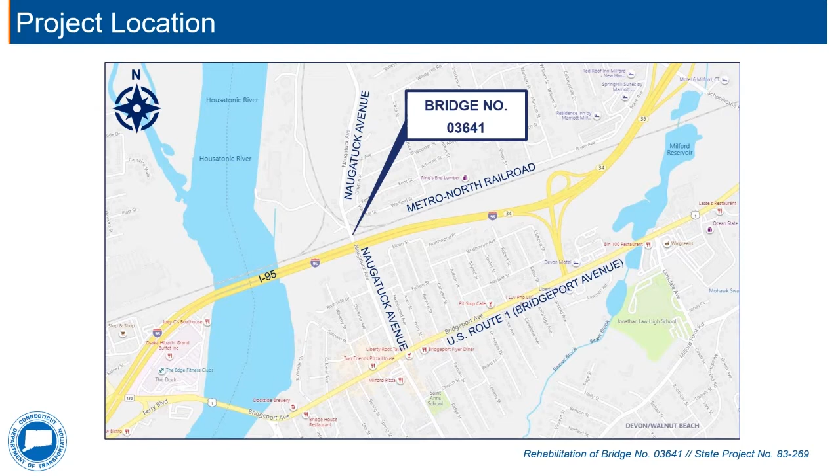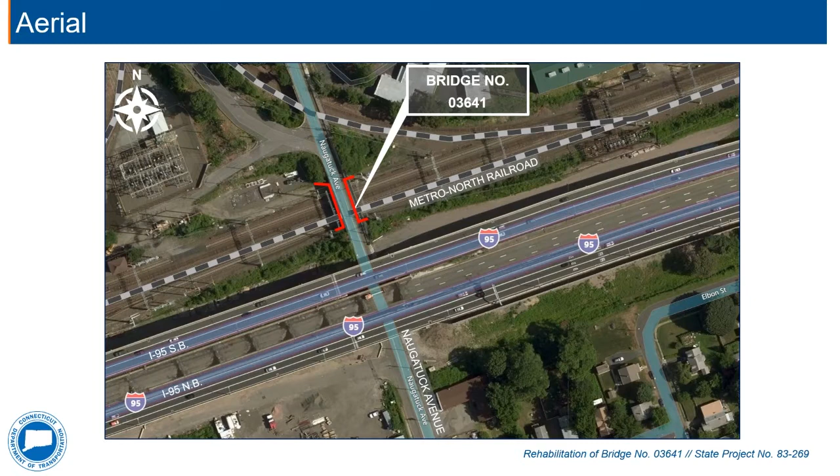During the course of this presentation, you may hear us use terms that aren't necessarily familiar to you. We thought it would be helpful to introduce you to a few.

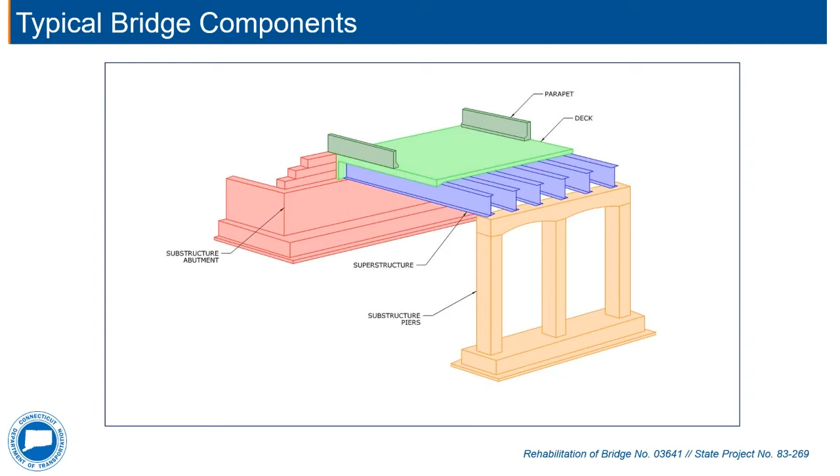The average daily traffic, or ADT, along Naugatuck Avenue is approximately 3,500 vehicles. This is based on the 2015 CT-DOT traffic log. Traffic on the tracks consists of 19 daily trains during the week and 18 daily on the weekend.

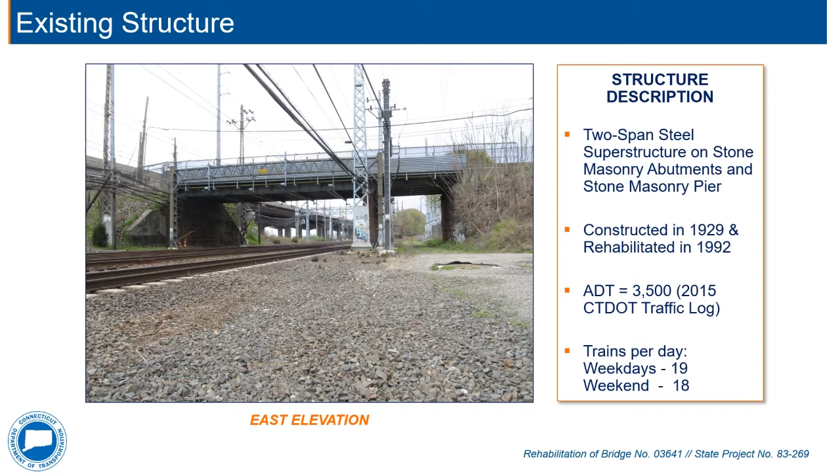This slide shows a closer look of the structure at track level. As mentioned before, this is a 99-foot-long, 2-span structure. The first span is 67 foot 10 inches long and crosses over 4 Metro North rail lines.

It is comprised of 2 steel girders with a floor beam system that supports concrete deck panels. The second span is 26 feet 5 inches long and crosses over the adjacent access road. It is comprised of multiple steel stringers that support concrete deck panels.

There is one sidewalk on the east fascia of the bridge. The curb-to-curb roadway width of Naugatuck Avenue in this location is 23 feet.

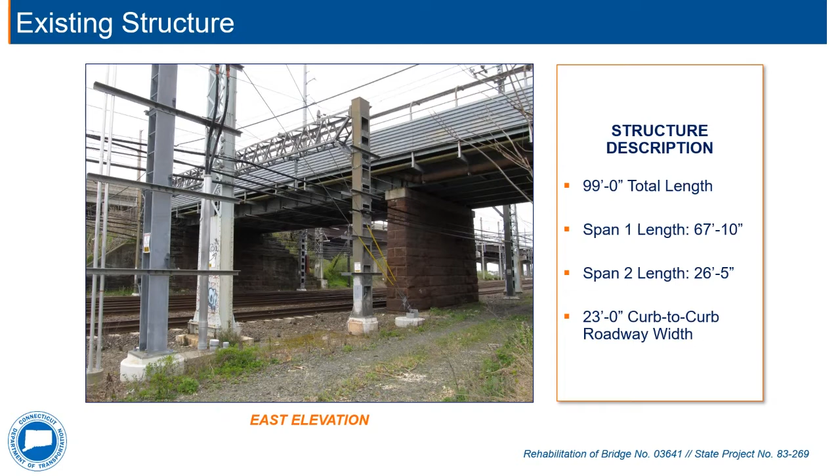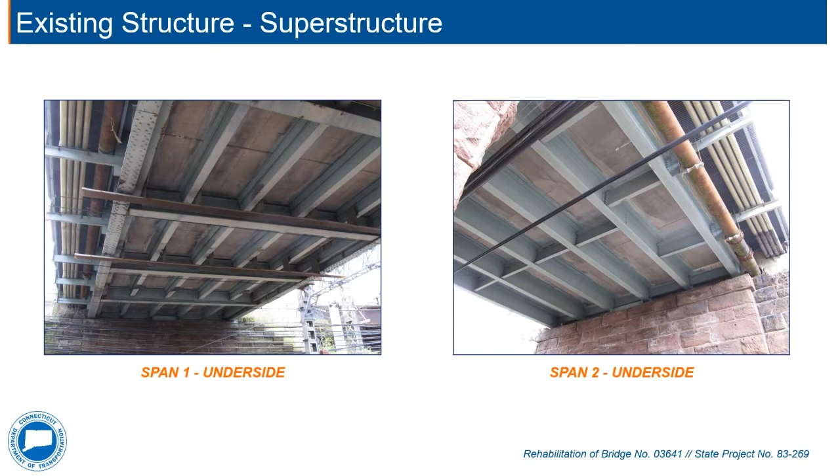Every bridge is evaluated to determine its ability to carry load. This analysis is called a load rating and considers several different types of vehicles which are predetermined by Connecticut and federal agencies.

Our bridge, bridge number 03641, has a substandard load rating which indicates a need for bridge strengthening.

I will now turn over the presentation to Greg Garish from BL Companies, who will explain the proposed project to rehabilitate this bridge.

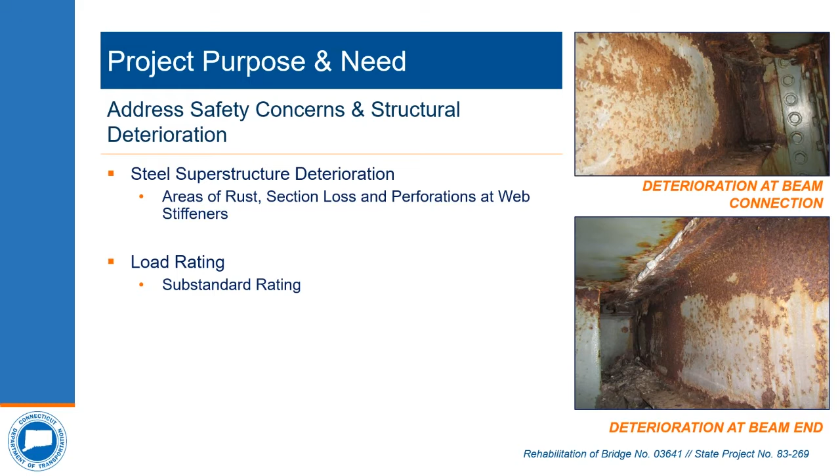The proposed rehabilitation will replace the existing bridge surface or bridge deck with a new concrete deck at span 1, which is the section of the bridge that crosses over the railroad tracks. We will also replace the span 1 concrete parapets and repave the bridge surface and approaches. Span 1 steel beams will be evaluated by the design team to be repaired and replaced as needed. The superstructure beams will also be repainted. Additional traffic protection measures will also be installed, including metal beam guide rail and precast concrete barrier curb.

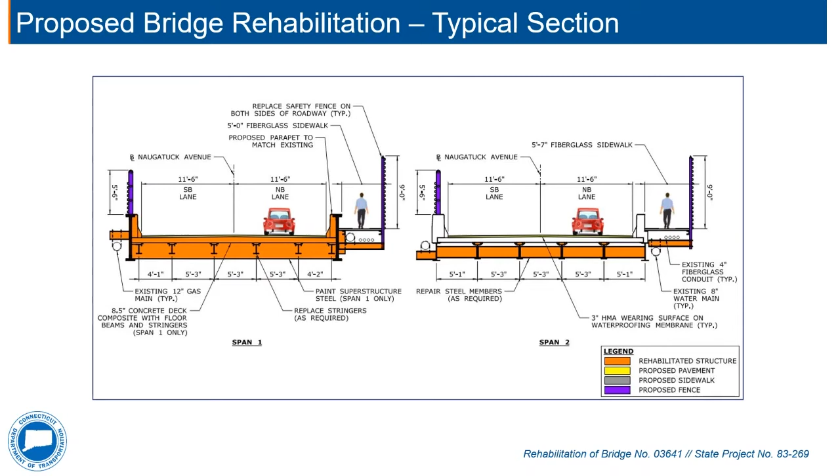In order to perform this work, traffic will be temporarily detoured around the project site via Naugatuck Avenue, US Route 1, and West Avenue. This is the posted truck route based on local road restrictions. However, local traffic will have the opportunity to use alternate routes. The proposed detour is anticipated to last 4 months.

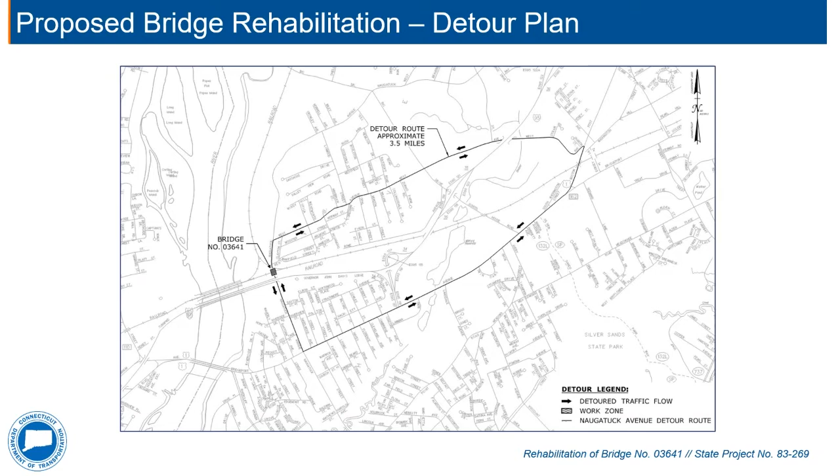Utilities supported by the bridge will be supported and protected in place during construction. Aerial utilities in the bridge vicinity will be relocated for the proposed work. The majority of the bridge rehabilitation work will be performed from the bridge surface and roadway. Minor repairs below the bridge will be coordinated with the railroad and will require night work during track outages. Environmental permits and impacts to rights-of-way are not anticipated for this project.

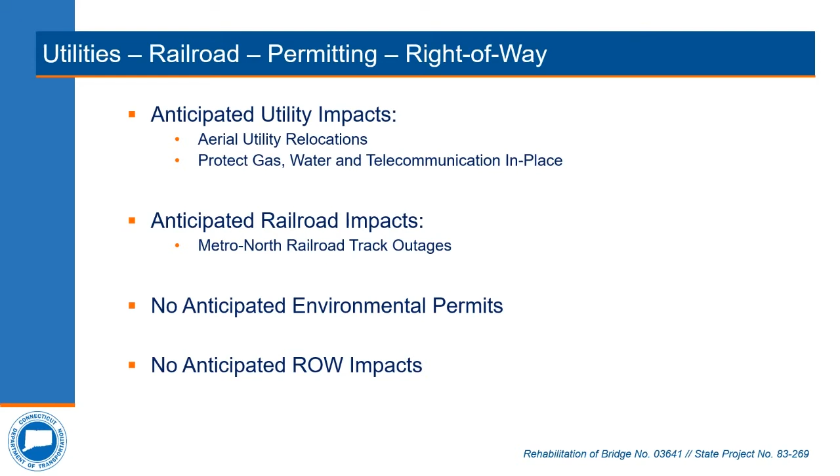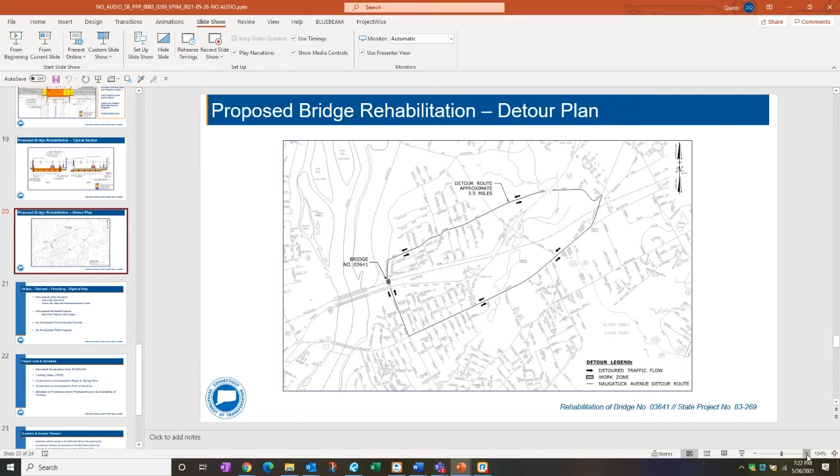The detour, as you can see here, is Naugatuck Avenue. The posted detour route will be south of the bridge. You'll take Naugatuck Avenue to US Route 1, and to the north of the bridge, Naugatuck Avenue, you take to West Avenue, and that'll take you all the way to US Route 1. Keep in mind that there is a shorter route for passenger vehicles where you can take Subway as well as Schoolhouse Road, and all traffic will still be able to access I-95 via Subway.

And Greg, I just wanted to add one thing to that too. The reason that we're posting the longer detour is to accommodate truck traffic. There are restrictions on some of these roadways that prohibit certain vehicles from utilizing them. So that's why, as Greg mentioned, there's a shorter route for the typical passenger vehicles, but that won't be the posted route. The one that we have here will be the posted route, and it will be utilized by all vehicles, and that's why we have to post it that way.

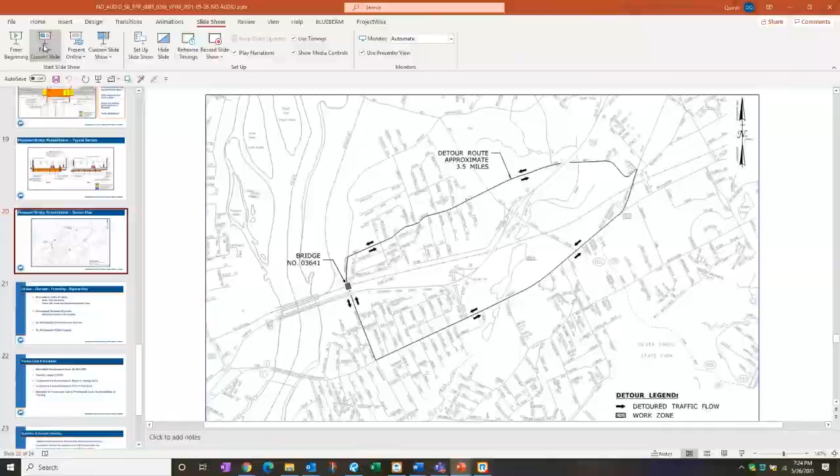Thanks, Mike. Thank you, Mike. That's a good point. And I just kind of want to reiterate a little bit, or just add to that. We did opt to do a little bit of a detour here, and I know that does have some impact to the traveling public. But the idea is that if we could do that, we would essentially save on the overall construction duration. So we expected that would be a much better solution.

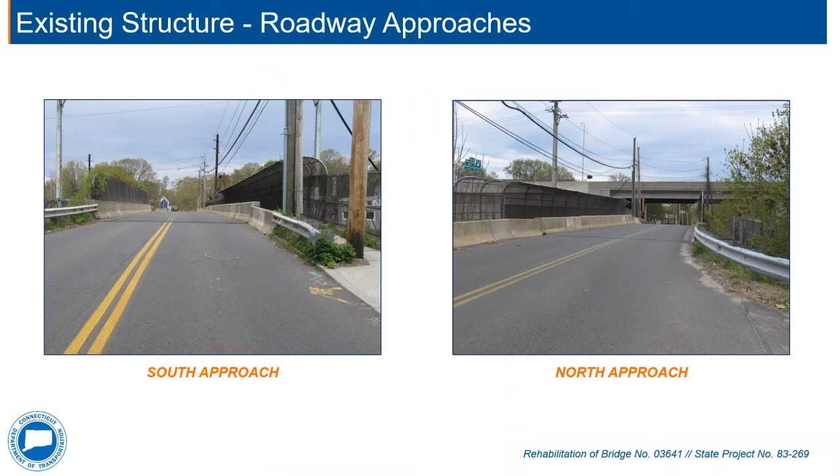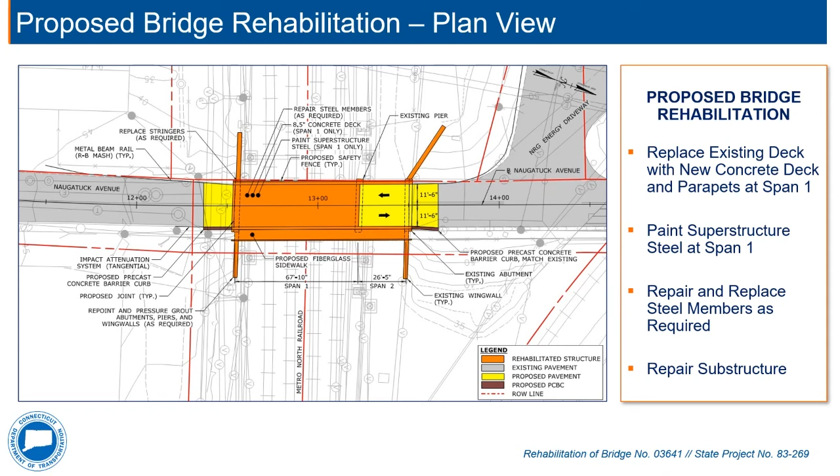Let's see if we have any other questions, just give it a minute or two. Again, thank you very much, everyone. We appreciate you joining us tonight. I know everyone's got busy schedules, but it's important that we hear anyone's concerns and give us an opportunity to answer any questions you might have. If you do have any questions, perhaps after this presentation that you think of later on, you're more than welcome to leave us a voicemail using the phone, as well as contacting us via email. We will be more than glad to return your call if you give us your contact information and/or email address. That will be up for a period of approximately two weeks, and then everything will be taken down. So please, by all means, use any of those means of communication to get in touch with us.

One other thing to mention again: there is a voluntary post-meeting survey that can be found at www.surveymonkey.com/r/R3RPXWS. If you can just take a few minutes to fill that out, that would be a great help to us as we move forward trying to make our way through this virtual world that we're all in right now. It gives us some good feedback on what worked and what we could certainly improve on.